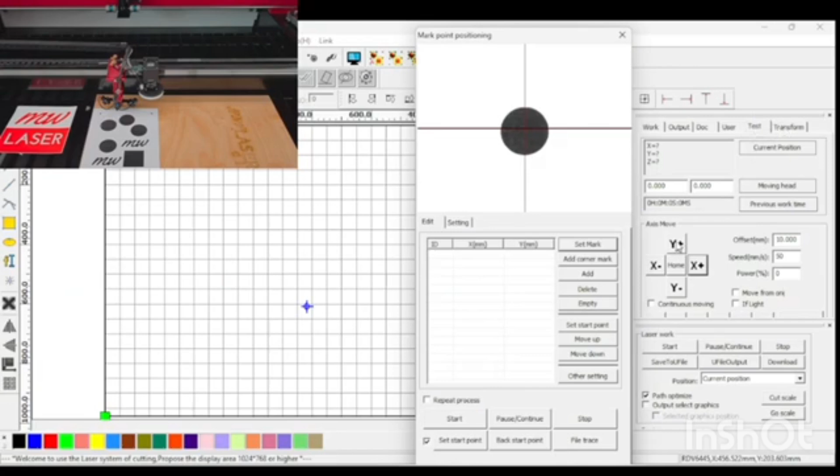You can also fine-tune that, like I said, using the test tab over here. We can then use the Y up or Y down, and the speed that it travels is here. So if you really want it to go slow, you can put in 1 millimeter a second and just move it 1 millimeter a second.

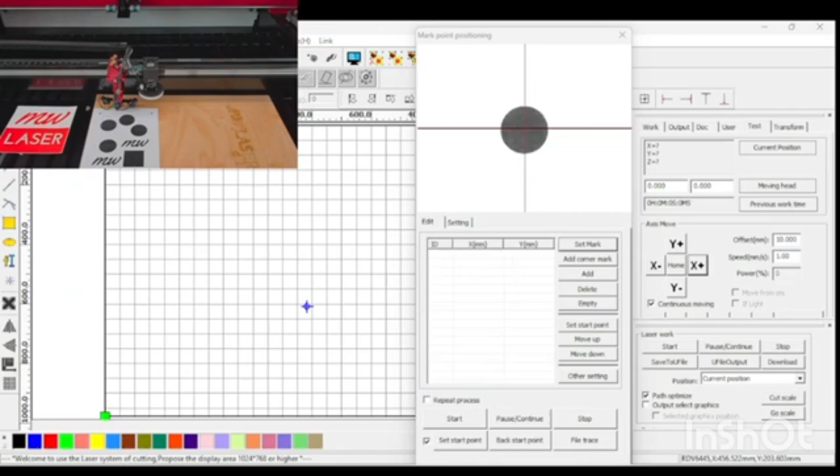The difference is now this still says an offset of 10. So if we want to have just continuous movement rather than an offset, we can go continuous movement and it will just move a little bit at a time. So you can adjust using these buttons. Now once you've got it close to center, then that's ready to go to the next step. So click on the setting button and enter the CCD calibration.

All right, when you open up the CCD camera parameters, you can see the camera, you can adjust the contrast, the gain. You can also have continuous auto exposure. So this will adjust if the lighting in the area that you're working in adjusts. You can leave continuous on, but you can also adjust your exposure and things like that here.

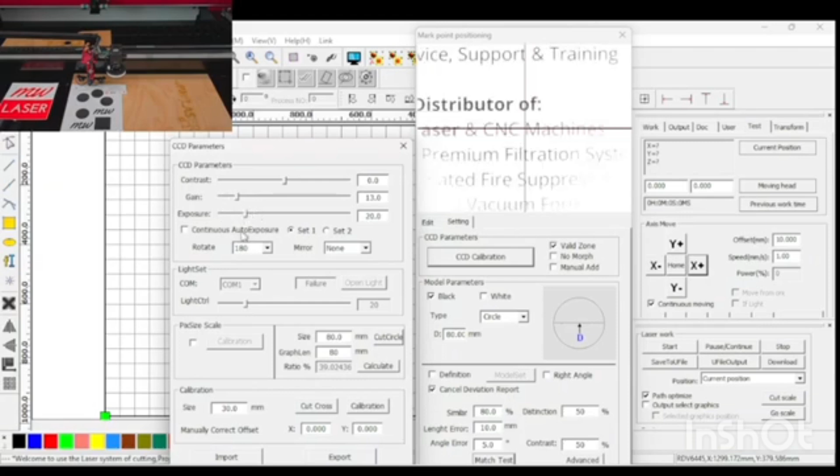You can also rotate the image. So if this that you're seeing was not clear or upside down, we could adjust it 180 degrees to make sure that the orientation is correct. So if it was set on 0, that's how it is in my machine, but I've adjusted it to 180 degrees. So again, we need to make sure that we have a clear image.

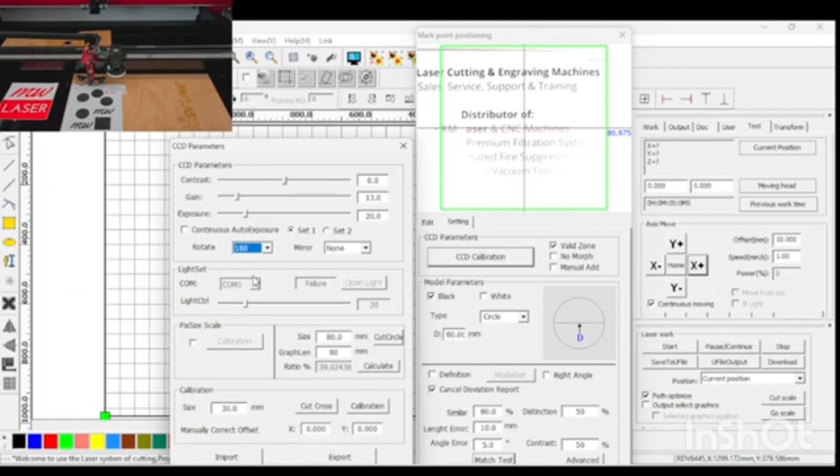Now using the adjustments here, we can view the screen and adjust the focus, the brightness, the white balance, the auto exposure, that sort of thing, until you get a nice clear image so that the camera can pick up those mark points effectively. So now we have a nice clear dot that we're going to work with. Now this dot is 6 millimeters, so we're going to start the calibration.

So we type that down here, we type in 6 millimeters. We're not going to cut the circle because we've already got a circle printed, so the circle is going to be 6 millimeters. Now for this graph length, what we do is we drag in this green box using the mouse to the edges of our circle. So we know that this circle is 6 millimeters printed, so we move these green boxes right to the edge and we adjust it as close as possible to the center so that we get a nice measurement.

Zooming out with the scroll wheel, we can then also adjust this down. Just drag that one down and we zoom in. So we want to make sure that the whole circle is encompassed by this green box and that no part of the circle is outside of it. Now you'll see on the side here that it will show that this is measuring at 10.53 millimeters.

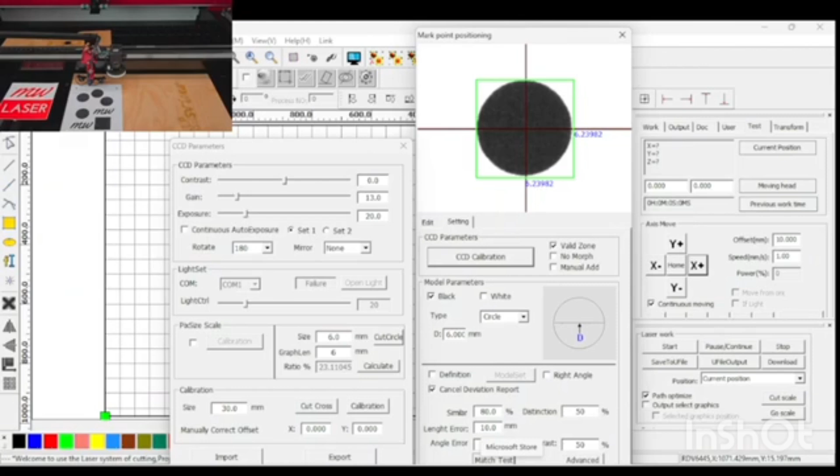Now you just keep going through this procedure of entering in the graph length and the match test until you're as close to 6 as possible. It may be 6.001 or 6.002, that doesn't matter, get it as close as you can, and then that is the calibration of the size completed.

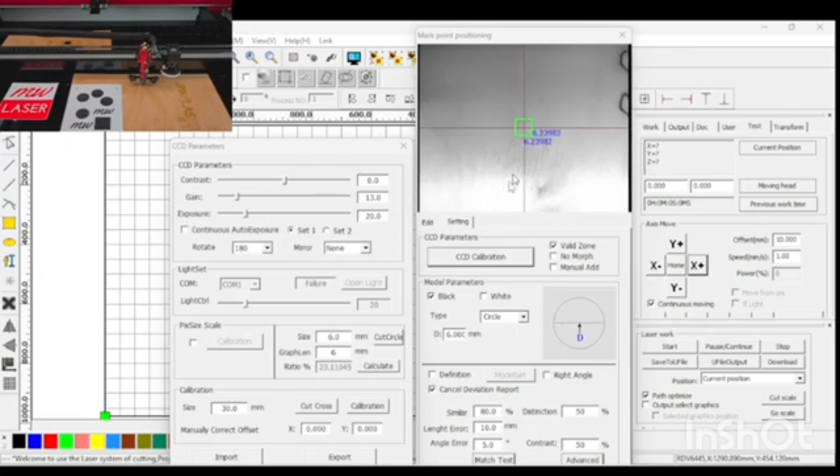The next step is calibrating the offset between the camera view and the laser head. So what we do here is move the laser head to a clear piece of material. I'm just going to cut over here on the pine or timber, and you can see my field of view there. We can extend this field of view up and out again.

Now what we're going to do is set a cross size of say 30 millimeters, and we will press cut cross. The laser will then cut the cross and the camera will go over the top of it.

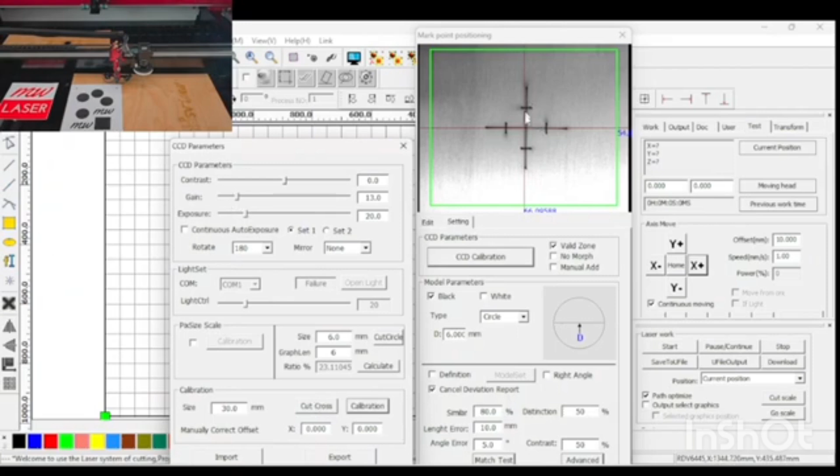Now this could be quite a long way out, but the idea is that we get this reticle of the camera directly over the cross that was just cut. So we zoom in, and again using the same steps, either using the right mouse click or the axis move buttons, we want to get as close as we can to the center of that cross.

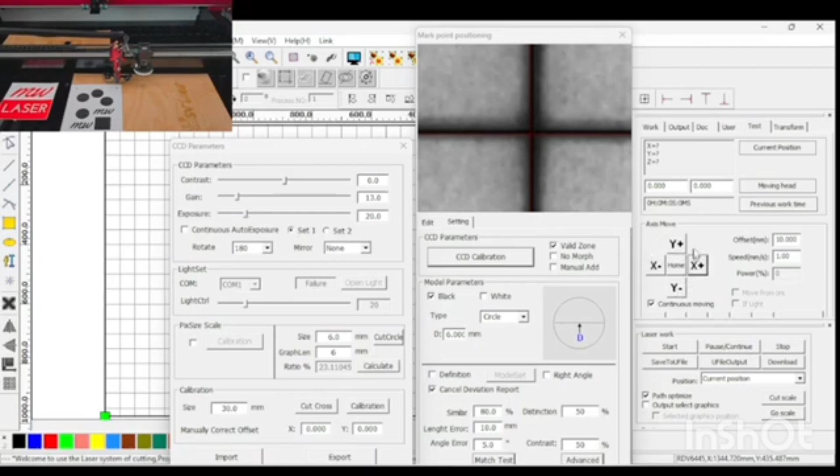We can zoom all the way in to get the highest accuracy. Now when I'm moving here, just a reminder, I'm using continuous movement with a speed of 1 to keep things really slow so I can fine tune it. If I want to fine tune it even more, say a millimeter a second is too much, or I want an offset of 0.1 of a millimeter, I could turn continuous movement off and move only 0.1 of a millimeter in each direction. So you can fine tune that and get as close as you can to the center of that cross.

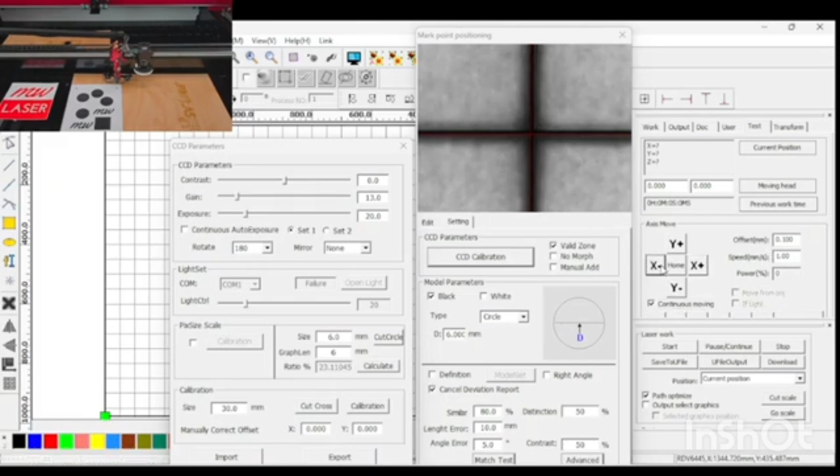Once you've done that, you press on the calibration and it will pop up and say success.

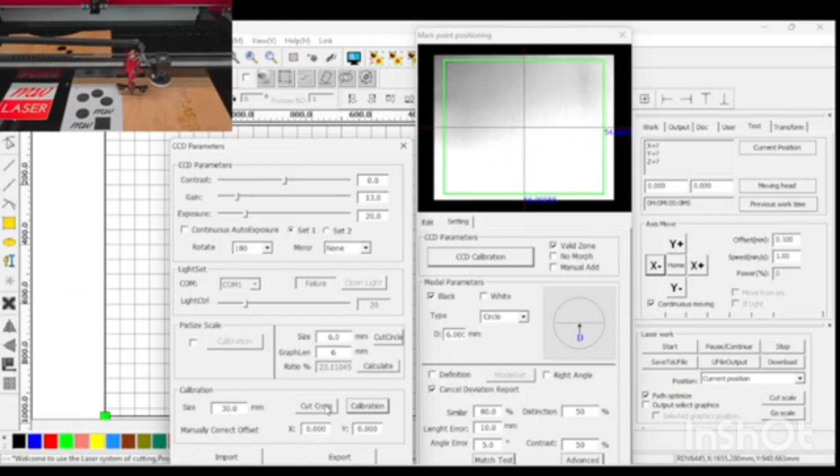So as you saw last time when we cut the cross, it didn't quite overlap properly, so we're going to redo that. We move the laser again to a clear piece of material and cut that cross again. And you can see now when we zoom in that it's gone directly over the top of that cross. So that is your calibration complete.

If you need to fine tune, you can fine tune it even further and press calibration, then recheck.

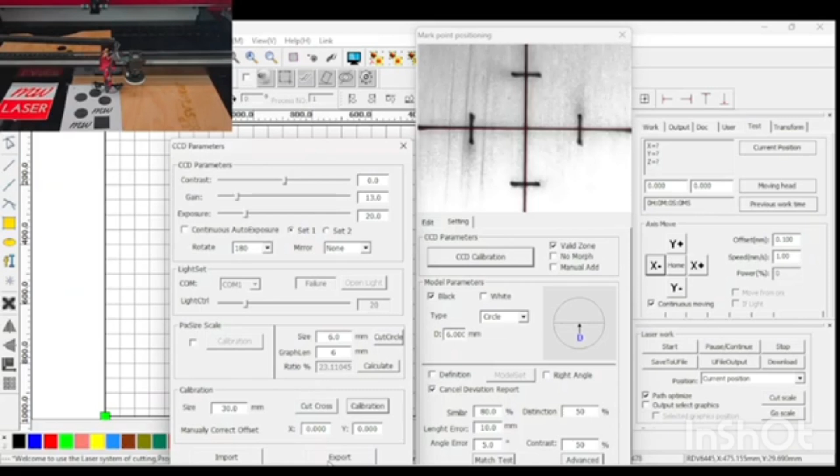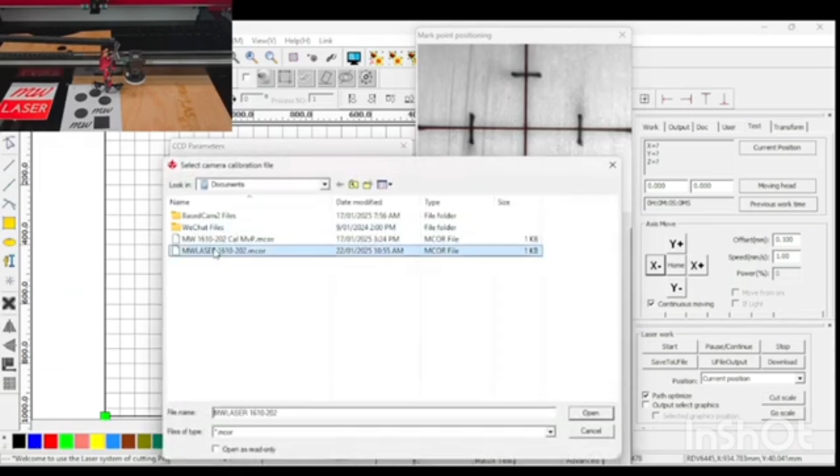Now it's a very good idea to export your calibration files so that if you change computers or need to reload the software, you can just import the calibration file without needing to redo your calibration every time. So we're just going to call this MW laser 1610, and then whatever date or time, or whichever machine it's attached to. Save that file. So next time if you were to load the calibration and it was out, we could import that calibration file and know that it's now correct.

And you can check it after you've imported it, again by going to a clear piece of material, cutting the cross, and seeing if it's over the top.

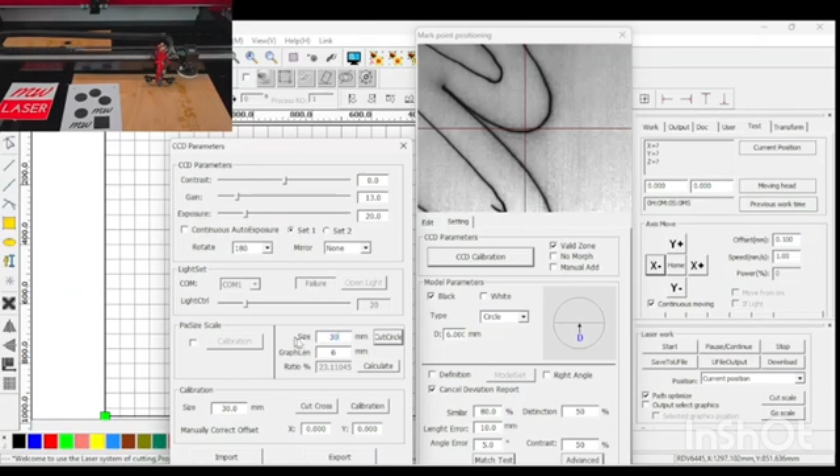We can also check the size calibration again, either by using a printout or we can tell it to do a circle cut. So we might cut a circle that is 30 millimeters. We will cut that circle. The camera will go over the top of it. We zoom out, tell it that the circle is 30 millimeters, and do a match test.

It will calculate it and say it's 29.118. So if we want to fine tune that any further, we can. Just remember that obviously the line is either on the inside or outside, so some of these deviations in values could be the thickness of that line.

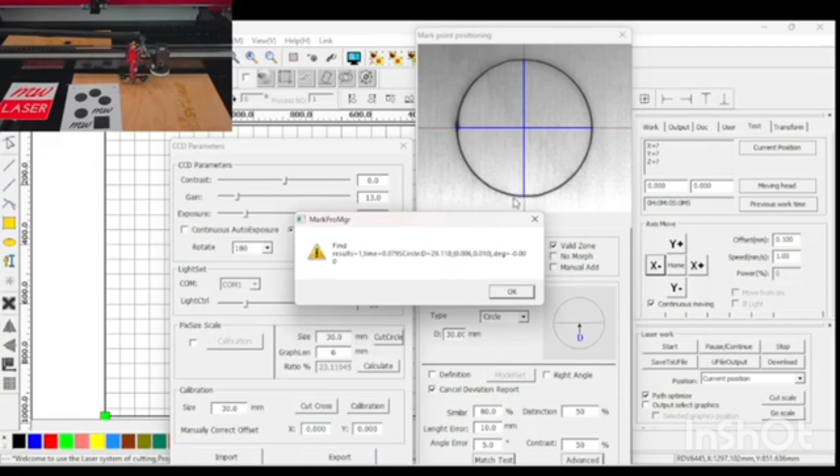That's why I like to use a printed copy. So if you wanted to do a match test on this little dot, we could tell it that the size is 6 and do a match test, and it will come up and say it's 6.025. So we know that our size is correct and our positioning is correct.

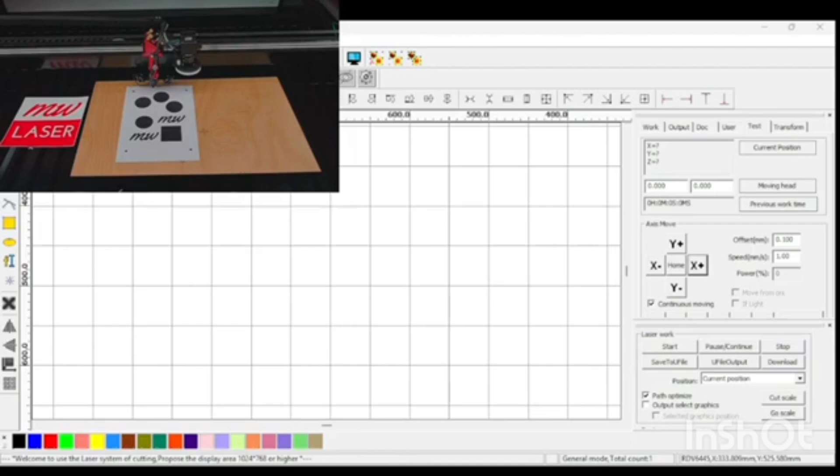Okay, so now we're just going to do a test. What I've done is printed out an A4 piece of paper with some shapes and some mark points. You can see that there. So now what we can do is use the file.